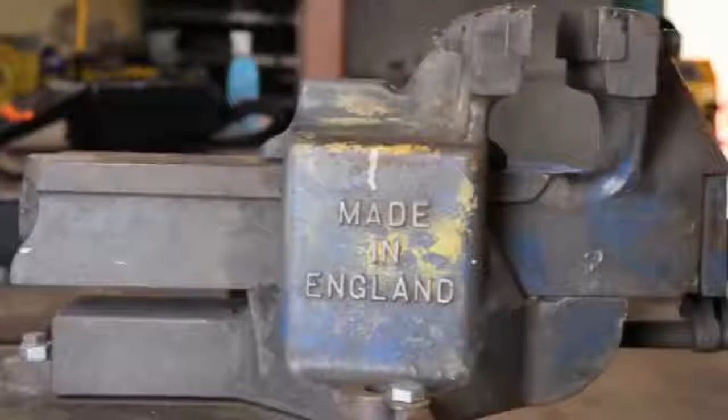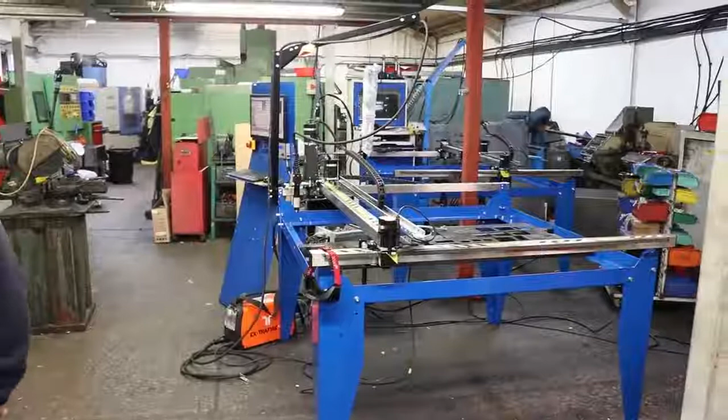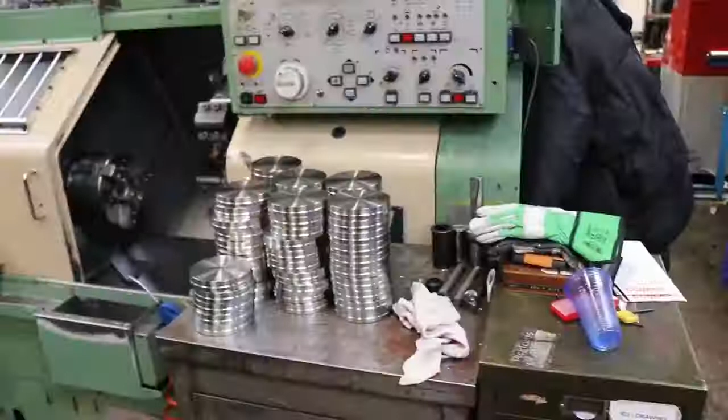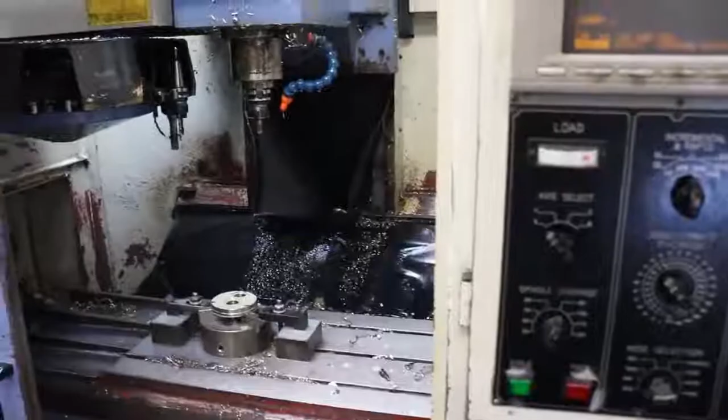Today I'm up in Gloucester visiting Extreme Precision Engineering, the company that makes the CNC plasma tables that I've got in the workshop. I've come to have a look around their premises and also do some training to learn how to use the software for drawing parts and using the machine.

Just having a nose around their workshop at all the machinery, and some machines ready to go out to customers. This is some of the electrical components that go into the electronics on the tables, and this is some examples of stuff they've cut out with the tables.

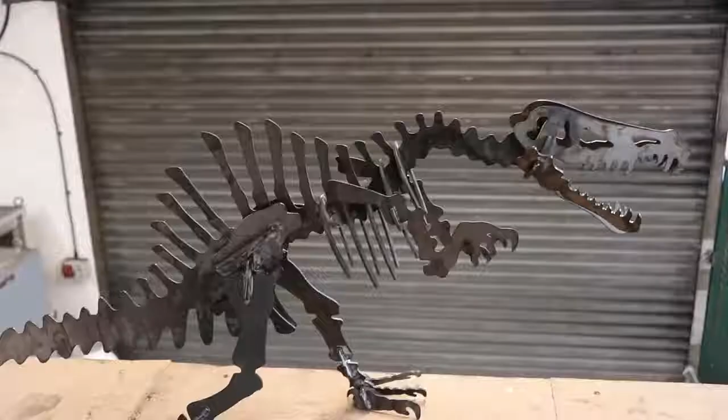This is Rob showing me, basically teaching me how to draw some basic parts and showing me how to use the software. This is like a little test room they've got where they do their training.

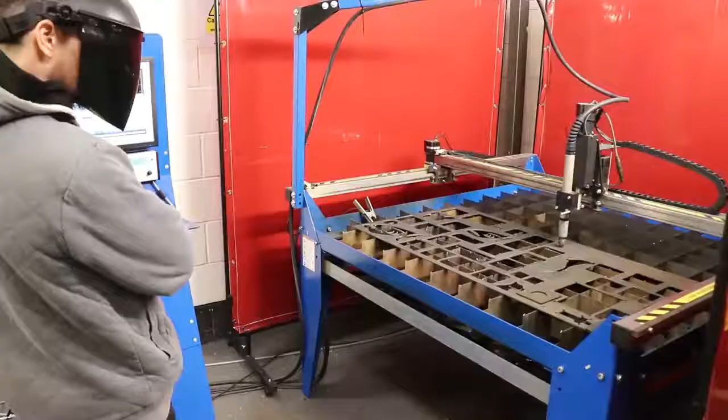So this is going through loading a drawing into SheetCam and then going from there into Mach 3, which controls the torch and the plasma cutter. Then this is like an artwork program where you can take a piece of art and load it into the system and pretty much cut out any piece of artwork that you want, really.

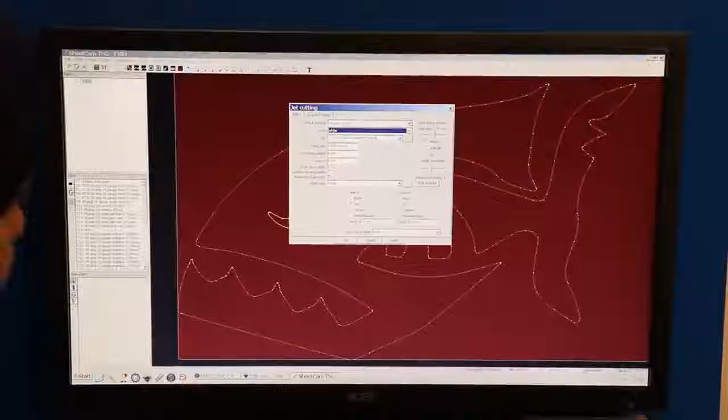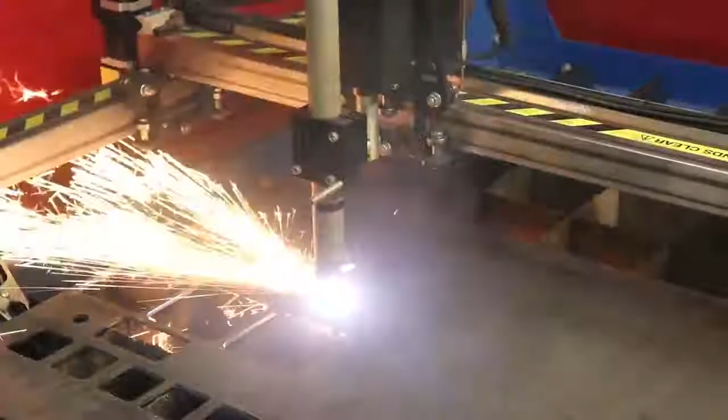It's a pretty cool feature if you're into making metal art and that sort of thing, but I'm going to be using it more for manufacturing parts.

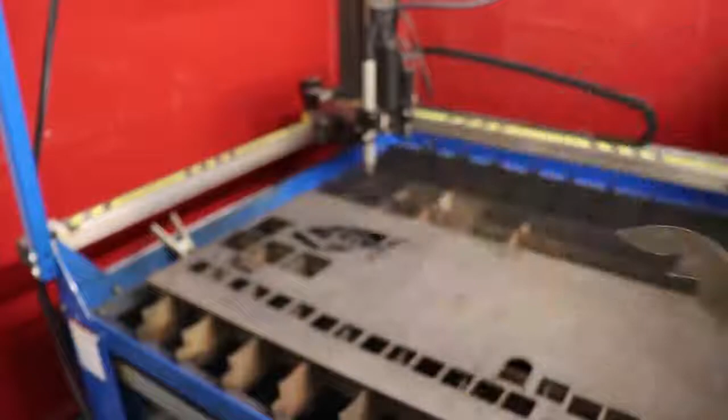This is a demo on some 10mm thick plate, and it cuts through that really cleanly. It kind of ramps its way into the cut, so you don't get a mess when it blows through the plate.

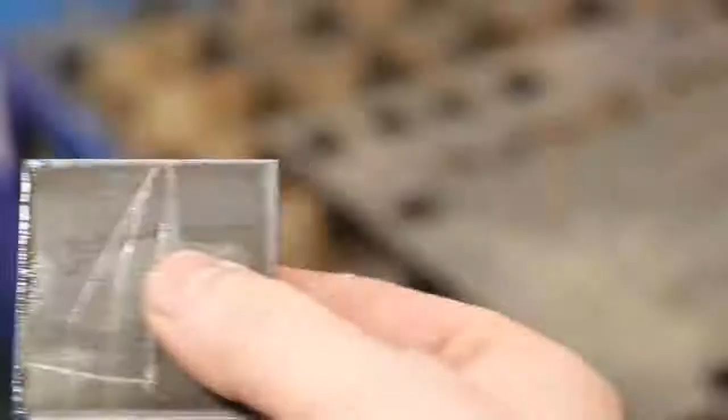That's a pretty clean cut for some 10mm plate. It can do a bit thicker than that, and depending on what plasma cutter you put on it, it can go thicker again. That's a really nice square cut on that piece.

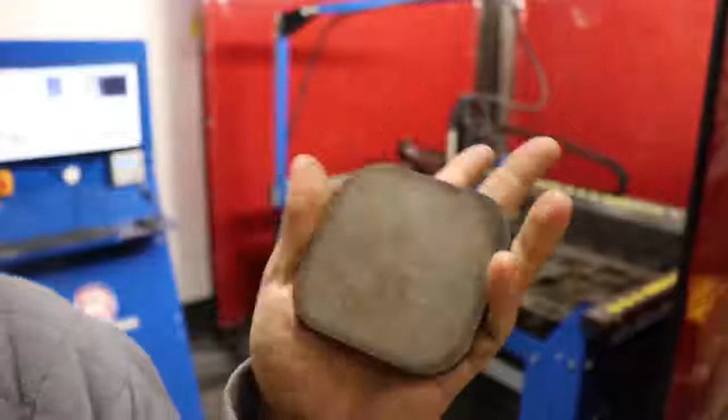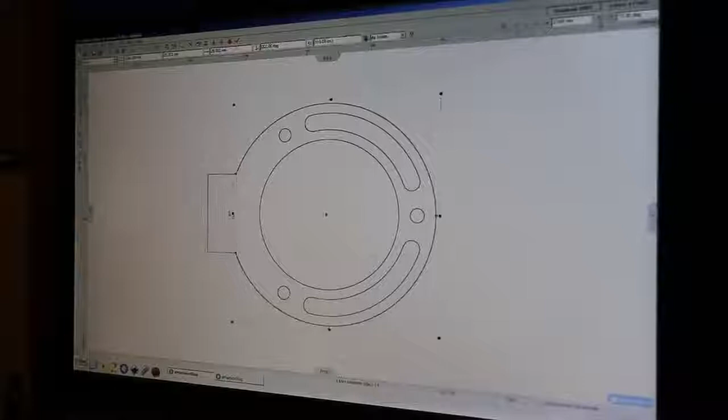So this is back at my workshop now, and this is a drawing I've done a few times. I'm just doing it again on camera, and I make a bit of a mistake with one of the measurements, but I'll correct that later on. This is going to be the first part that I'm going to be cutting on my table.

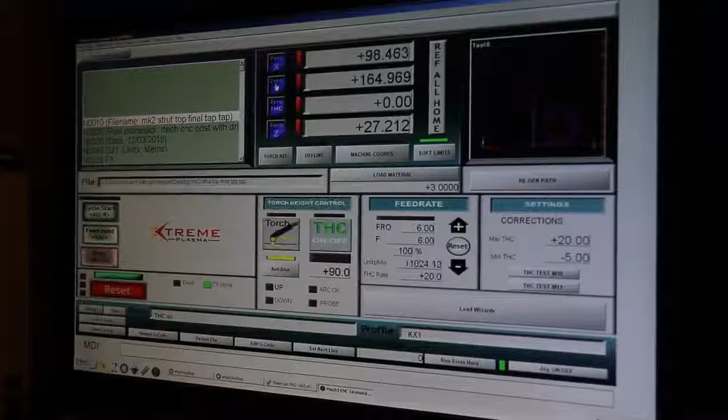Alright, so this is the first part I've drawn. I've done some test squares to set all the parameters and limits of the table. This is going to be the first part that I've actually drawn and cut. So I'm going to do a test run now just to make sure the torch does what it's supposed to do.

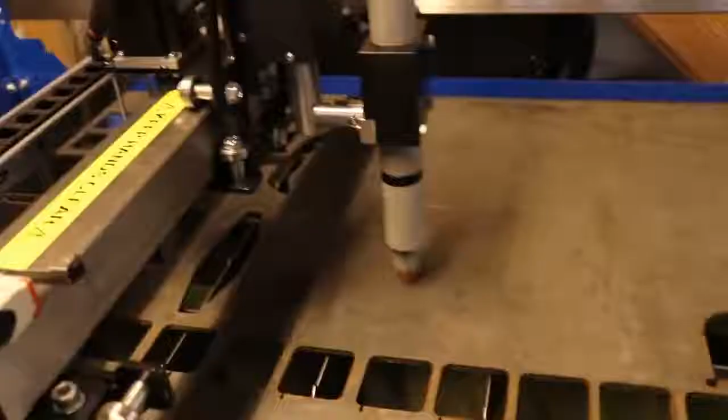So you can watch it doing all its cut paths, making sure it's not going to crash into anything. Then you should be good to go.

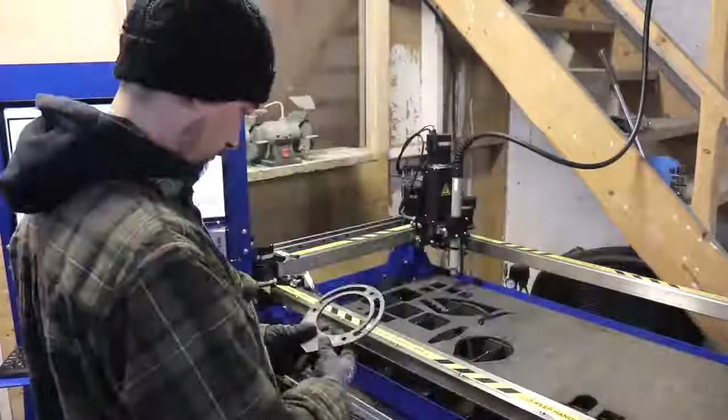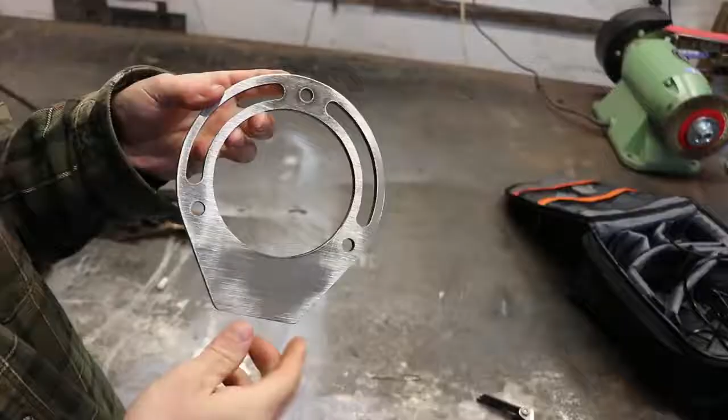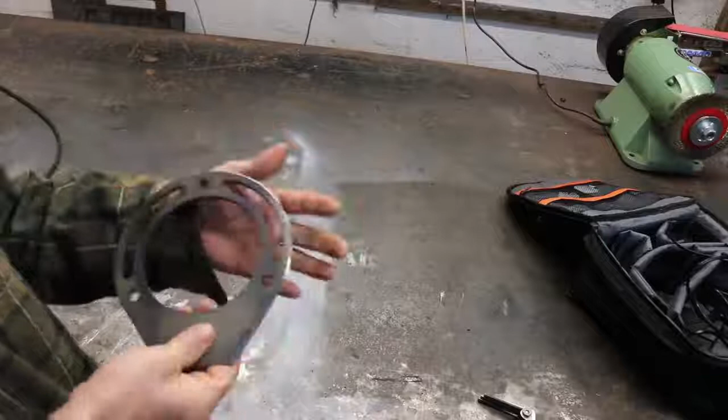How cool is that? When I was doing the drawing, I couldn't remember whether I had made this piece 50 or 60 in my other drawing. Now I've cut it out, I can see it was 50 in my first drawing. This came down to more of a point. I'm going to check that this actually bolts onto the strut top, then redo this drawing with this at 50mm instead of 60 and cut another one, but we'll check that all the bolts line up and everything.

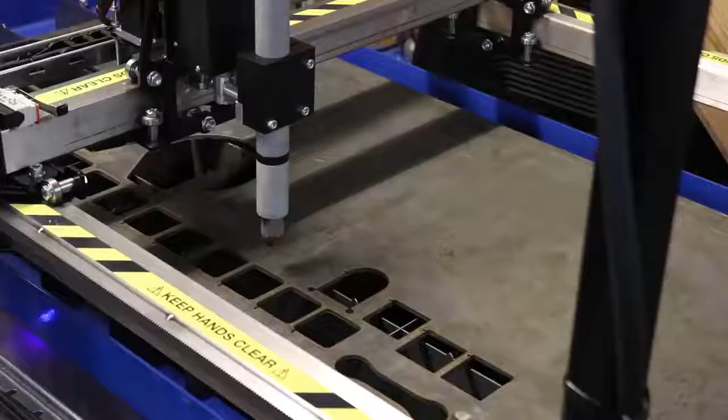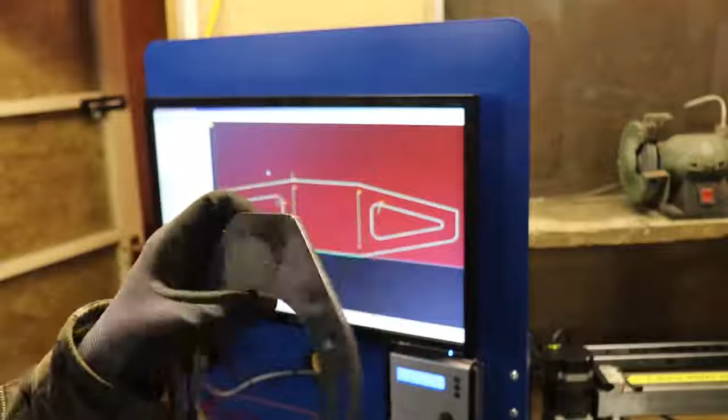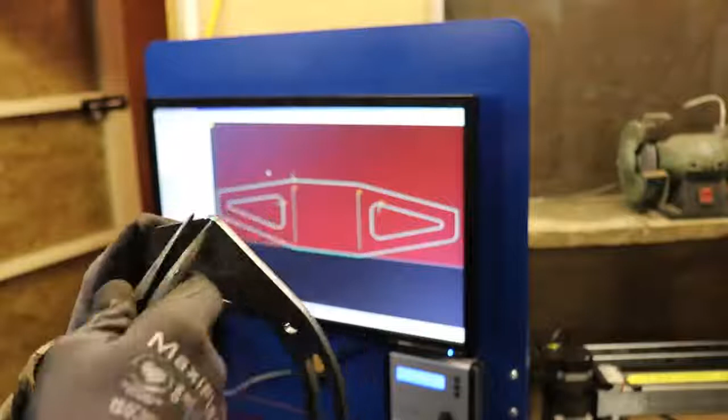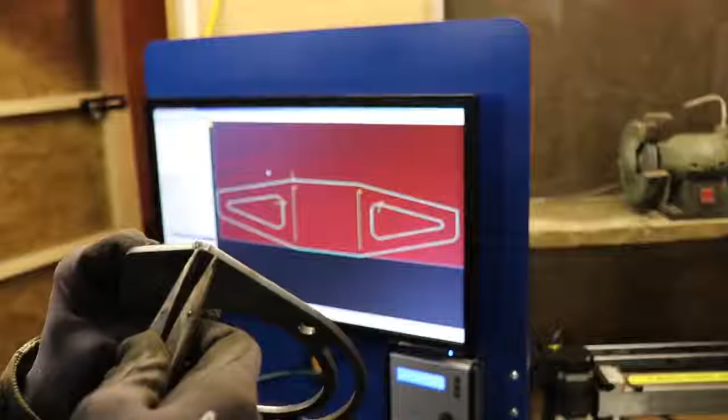I don't know if you saw the last bit of the cut, it went in again and did another cut. That's because I had an overlapped line here. It did give me a warning to say something wasn't right, but it was showing this as a solid line. So I need to zoom in on the drawing, there's obviously something like an overlap line here, but I can grind that off anyway.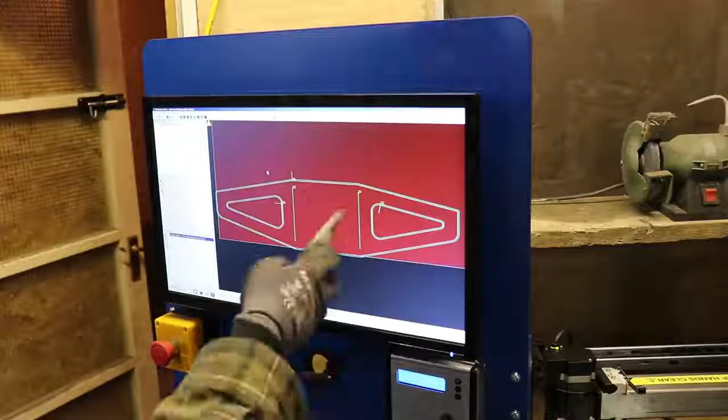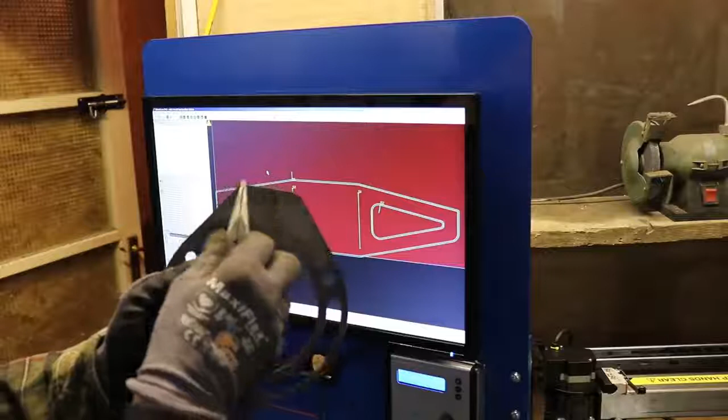But this is the second part of this, a little piece. These are just cutouts where they're going to be folds. So this piece will fold round to the same angle as that, and then we'll weld it on, and that'll be our mounting plate.

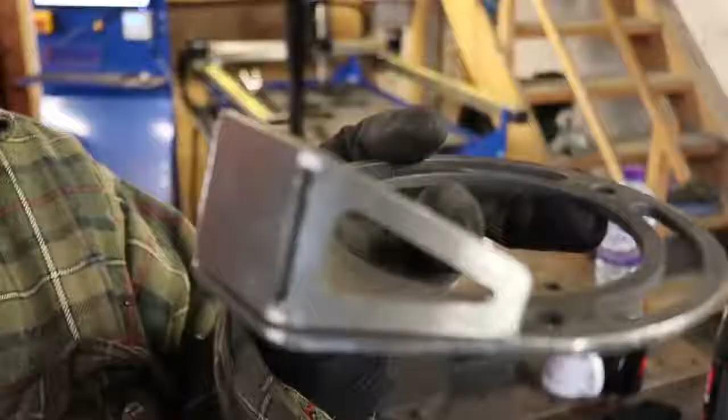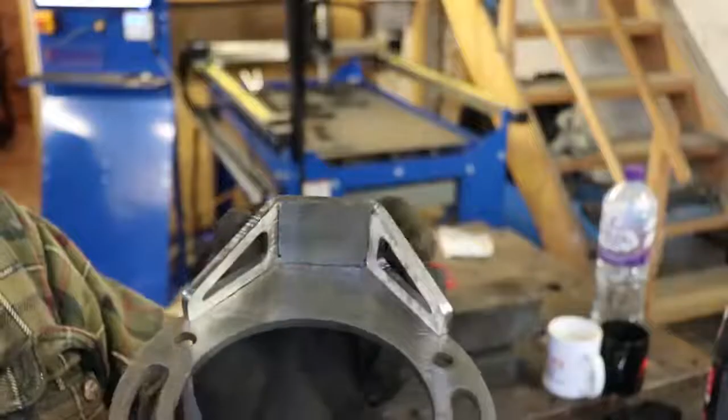I'll weld that around there, weld those slots up, grind all that flush, and that'll be sweet. I don't know where spring went.

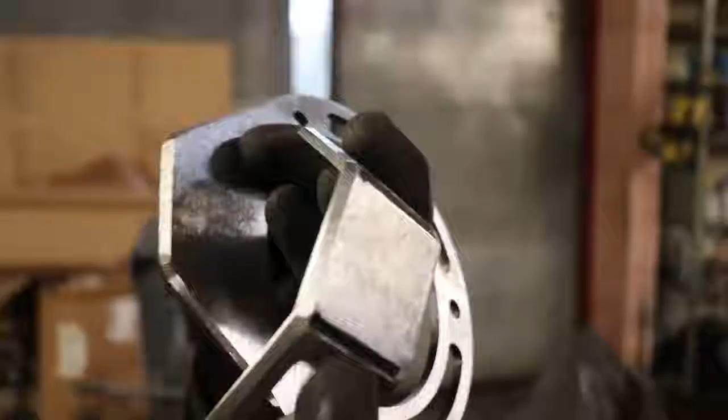So I've beveled these edges, so I've got a nice little valley to fill up with weld all the way around there.

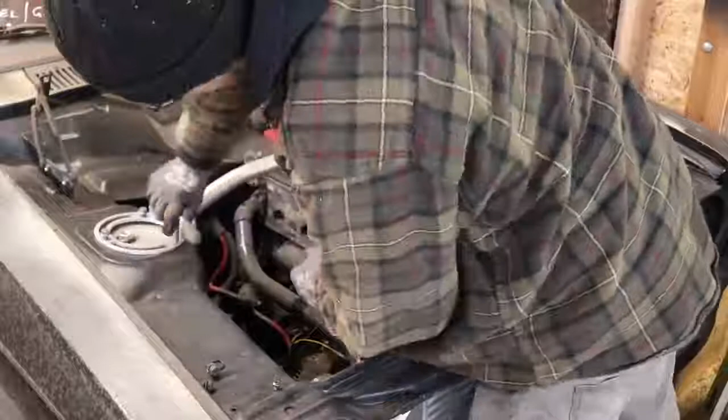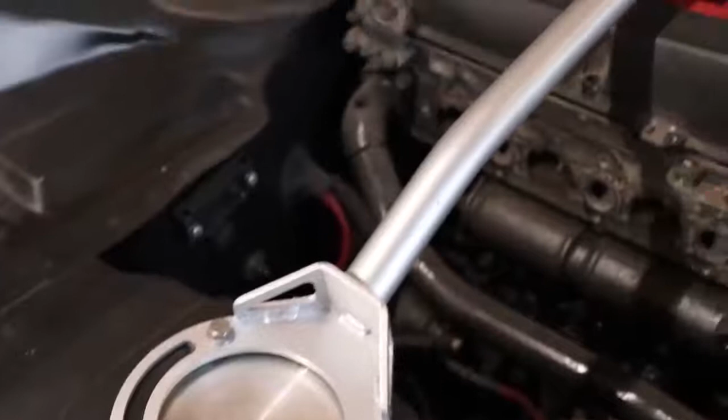Alright, that's my first CNC plasma project finished. I'm really happy with that. I've got to say a massive thanks to Rob at Extreme Plasma for sending out the table, and also for training me up.

Showing me how to use it and getting me up to speed with drawing parts and then cutting them. I was a bit concerned it would be something I wouldn't be able to get my head around, because generally I'm really bad with anything computer based, but it's just 2D drawing, and it's actually quite simple. I've only done very basic stuff there, but that's way further along in one day than I thought I would be.

So yeah, really happy with that. Still got loads to learn. Now I've done one part and it's been a success, my mind is just churning over with ideas of stuff to make now. Looking forward to the future with this thing, and seeing what I can come up with.